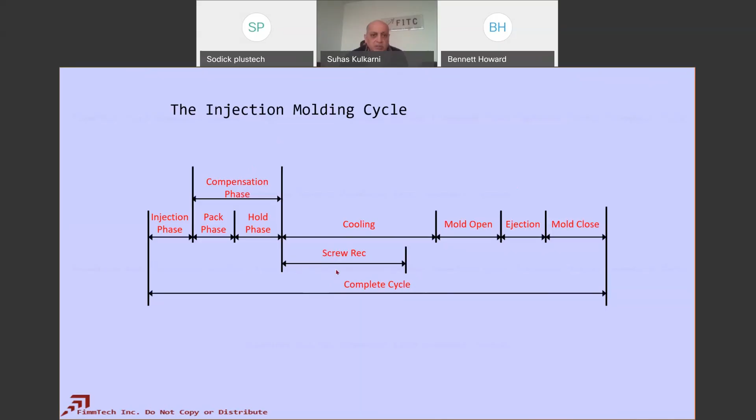There are what I call 11 plus 2 injection molding parameters on the machine. In no particular order of importance: cooling time, pack and hold pressures, pack and hold times, melt temperature, injection pressure, injection speed, back pressure, screw rotation speed, shot size, transfer, and mold temperature. So I say 11 plus 2, I don't say 13. Why is that? Because if you do not split pack and hold into two, you have 11. If you do end up splitting them, then you'll have 13.

When do you split them? A great example is if you've got a hot runner system, or if you've got a very large gate. In that case, you'll have to have a pack and hold separated. So these are the inputs.

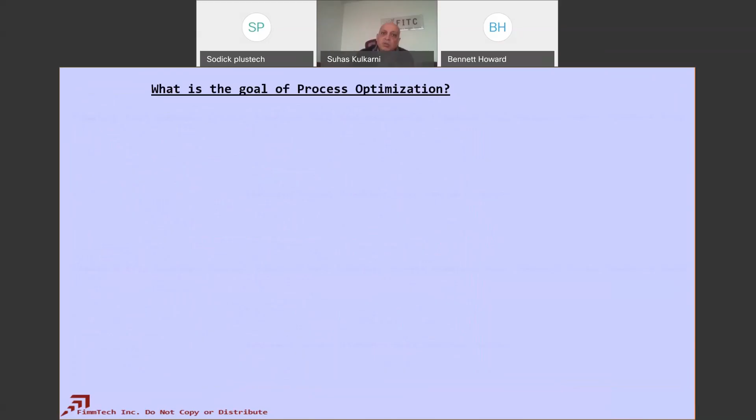Okay, thank you. So now let's understand - let's go back to the back pressure. So what do we do? What are we trying to do always when we're doing a mold qualification or coming to the molding process? You're setting the molding process so that the parts you make are going to be very consistent. That's what you're trying to do. So you have to ultimately reduce all the variations.

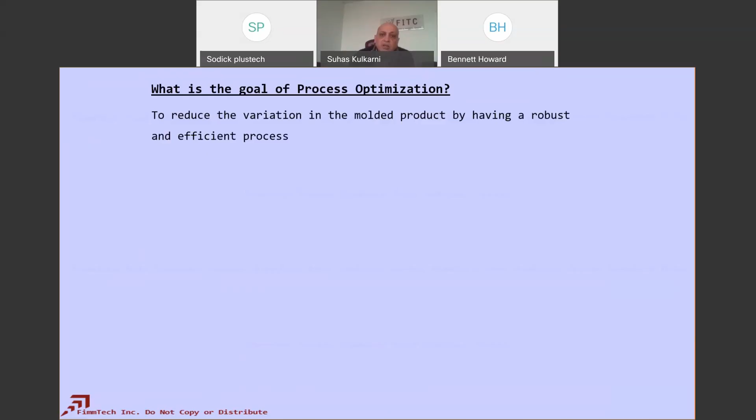Variation, where does it come from? Variation can come from all these molding parameters, all these 11 plus 2 molding parameters. You'll get variation from each of them. So what is your job? If you want to reduce the variation in the final molded product, you need to make sure you reduce variation in each of these 11 plus 2 parameters. So you cannot get rid of variation - it will always be present. You just need to know how to minimize it.

And that's one thing I've done over the years - I've developed some of these techniques, and some of these are not my own techniques. For example, the viscosity curve - people from RJG, teacher John Bozzelli, came up with these things. Of course I borrowed that, but there's a lot of other stuff. If you go through my class, it's a 4-day class, you'll see there's something, especially design of experiments - that is my huge, big area in injection molding. So I have come up with these things. In fact, the one I'm going to show you today is also something I came up with about 7-8 years ago, and I've started formalizing that and teaching it.

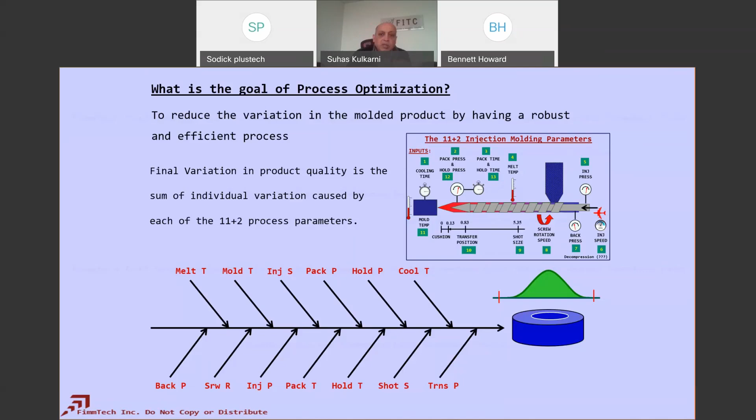So my goal is to optimize and reduce the variation in each of these 11 plus 2 molding parameters. That's when you'll be able to reduce the variation in your molded product. Where do you get your current source from? One second here, I'm trying to hide a panel.

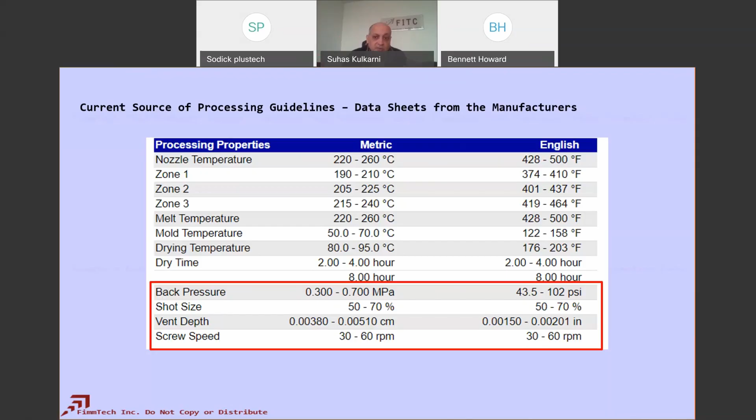I have done some studies on vent depths. Look at this vent depth, it's 0.00201. Can you show me a machinist who can machine that to that accuracy?

So screw speeds, I talk about screw speeds here, RPMs, right? RPMs is not a thing. So again, please do not take this as the Bible and say, hey, this is the molding Bible, and therefore this is what the suppliers are telling, and that's what I'm going to use.

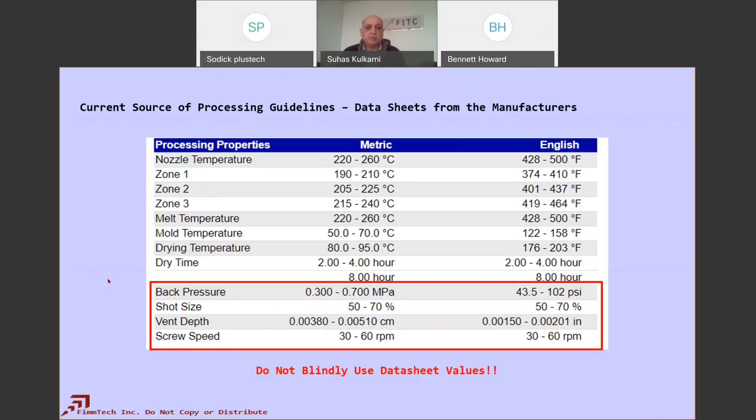So that's not the right way to do it. So don't blindly use data sheets. Also, data sheets, when they give you information, it's very misleading in other ways too. Look at this - it says fabrication conditions for injection molding. Of course they use this stuff. It says barrel temperature, chilled water.

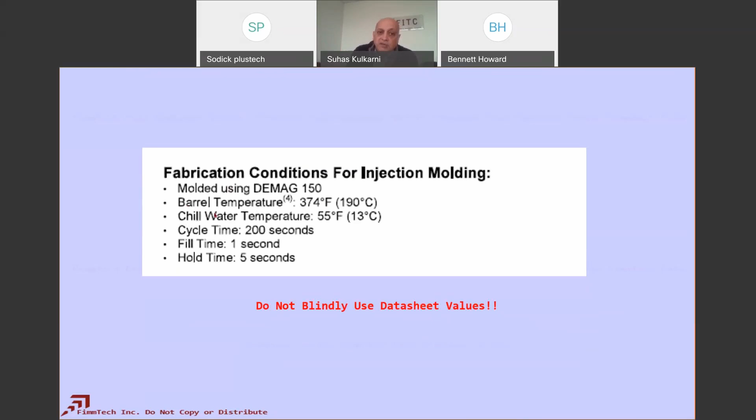Cycle time is 200 seconds. I don't know which company is going to be in business if they run a mold for 200 seconds. And this is a very large part, of course. Yes, but we don't work that way. And then they're defining fill times, defining holding times.

And then it says typical value is not to consider specifications, user should confirm their own result. So what I'm getting to is that, guys, for your back pressure values or any values, do not use the data sheets blindly. Be very careful when you look at the data sheets, and also educate your customers who are not in the molding business - educate customers that there's a lot of mistakes in these things.

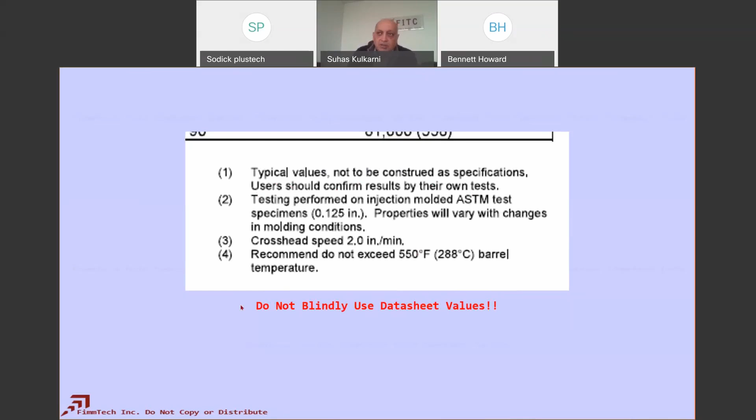I hope that somebody in the materials suppliers is listening to this talk, and then they go make those changes. So again, I'm very big on basics, so I'm going to tell you a few basics here. There's something called the PVT diagram.

This plays a huge role in back pressure, so I want to tell you this. What's a PVT diagram? It simply means that if you take any plastic and you start increasing the temperature, the volume increases. So here it is at atmospheric pressure, 0 MPa - the volume keeps on increasing as you start increasing the temperature of the plastic.

But now plastic melt is compressible, it's like a big ball of rubber band. So you can actually compress the same amount of plastic, and when you compress it at that temperature, what's going to happen is the volume is going to reduce. That's exactly what we do in injection molding - you melt the plastic in the molding barrel, and at high pressures, you inject it inside the mold.

When you inject inside the mold, because the mold is cold, it starts to cool down, and now the volume also reduces. So you're basically getting a combination of this PVT diagram inside your mold. That's the whole idea of using pressure sensors supplied by RJG or Kistler. What they do is that if you get the same pressure, volume, temperature at a given time inside the mold, that means now you have got the same quality of part. That means you've got the same amount of molecules, and therefore your density stays the same, and therefore you're going to get the same dimensions.

Okay, so keep this in mind, right? Again, this is a basic thing. How does it play a role in back pressure? You'll see that very soon here. So this is your PVT diagram.

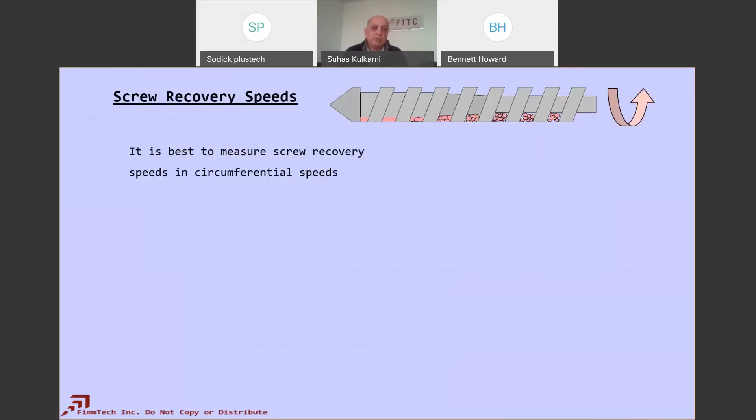Screw recovery speeds is related to, of course, because we're talking about screw and back pressure, all that stuff. Always make sure that you're measuring your screw recovery speeds not in RPMs, but always in circumferential speeds. Why is that? Because if you have got a large vehicle like this and a small vehicle like this, 1 revolution of a small tire is going to go a shorter distance compared to 1 revolution of a larger vehicle.

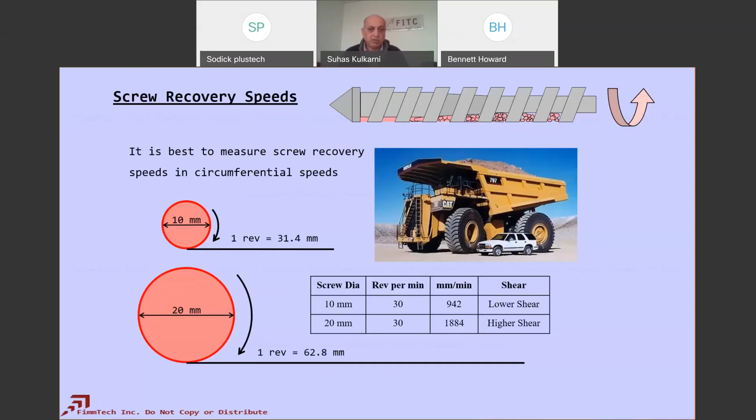So what happens is you have 2 screws, same RPMs, one is going to have a low shear, other is going to have a higher shear. That plays a role in your melt temperatures because you're giving shear energy to the plastic. Okay, so that's to do with screw recovery speeds.

Now, what's back pressure? So if you visualize yourself going down a slope with this load, or you're running down a slope. Saturday morning, you decide to go for a run and it's a big down slope. What do you tend to do? You tend to apply a force that is opposite to the direction of travel. You're traveling here, but you put some force opposite in this direction. Why? Because you want to control the rate at which you take this load down the slope.

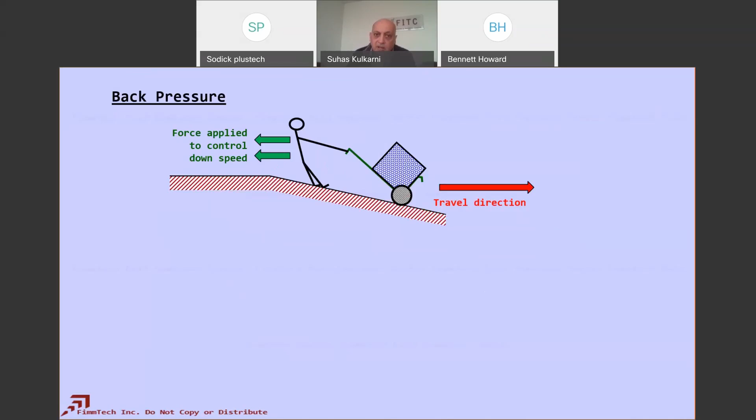If you don't do that, what's going to happen? You're going to crash and fall down. So what do you do? You apply that force. The same thing happens in injection molding. As the screw is turning, there is some amount of pressure that's applied at the back of the screw so that now you're bringing that screw back consistently, especially at high screw speeds.

There may be some people who are new into injection molding out here. The way this works is that during injection, let's just say the shot has been built up. During injection, this screw acts like a plunger. There is no function of the back of the screw out here. The flights are useless. During injection, it's only a plunger, just moving it straight. There's no turning taking place.

Once the plastic is injected inside the mold, then the screw starts to turn. When the screw starts to turn, it acts like an auger. So the plastic now gets conveyed in the front and it comes and settles in front of the screw. There is nothing pulling the screw back. As the plastic comes and sits in front of the screw, as it collects here, it now pushes the screw back. That's how this works.

Now, if I don't put some pressure here, what happens is that the screw can just turn erratically and basically come and make the shot size. The shot size is where you start the injection of the plastic. It can come in and hit, especially at high screw speeds. So you're going to have a bounce. If you think of it, there's going to be some bouncing taking place.

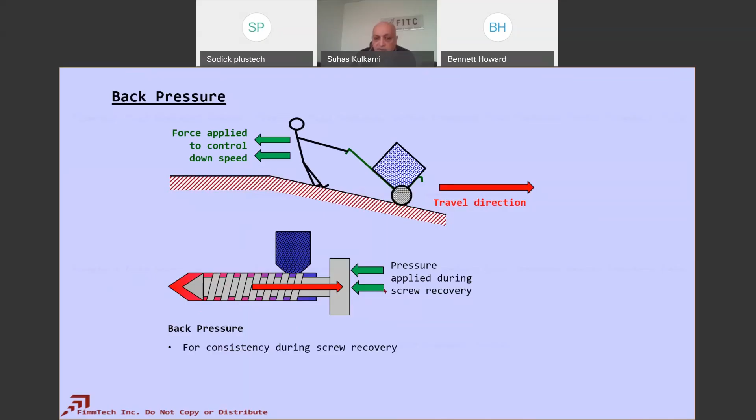It's going to come and hit your shot size, and what happens? The amount of plastic that is in front of the screw then is not going to be the same every single shot. So what you do is that you have to put some amount of pressure at the back, we'll define how much, so that you can consistently bring the screw back. That's the first thing you need to do. Then there are three zones on the screw: there is the feed zone, a transition zone, and then a metering zone. What does each of these things do?

In the feed zone, you do not want to melt the plastic, especially in the back part of the feed zone. Typically on a general purpose screw, a GP screw, this portion is 50% of the screw, this is about 25%, and this is about 25%. The outside diameter stays constant, but the inside diameter is constantly changing.

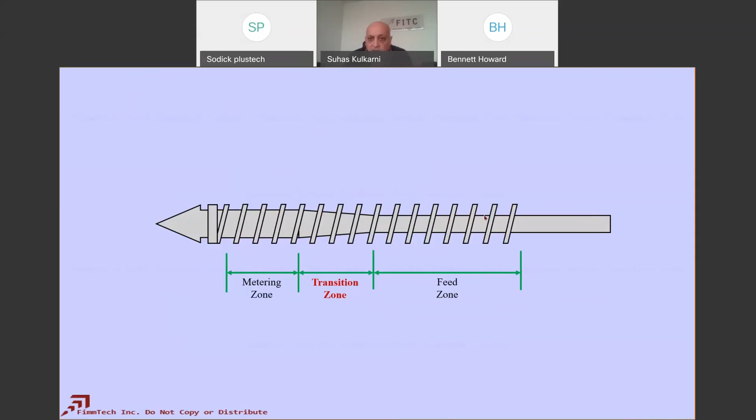So what happens? The plastic comes in here. If you melt the plastic right here at the feed throat, what happens? The plastic gets stuck here and is not able to get the fresh new plastic inside. So you just want to convey the plastic here, you do not want to melt it.

By the time the plastic comes to the front of the feed section or the back of the transition section, these things are like marshmallows, really soft, not completely molten but very soft by the time they come in this area. This is your feed zone.

Then you take these marshmallows, and because there's a reduction in the flight depth, or an increase in the diameter here, what happens is you're squeezing those marshmallows and pushing all the air out of the system.

Look at these images I've taken out here. It took me a long time to get these images, I had to pull the screw out like 5 times to get them this way. But you can see in the feed zone, the plastic pellets are all stuck to each other, like the marshmallows.

But you can see there's a lot of space. What is in between the space? That is basically air in there. When it comes to the transition zone, this is where you now start to compress it. As you start compressing this, you'll still see some amount of air in these areas, not unmelted plastic, but air.

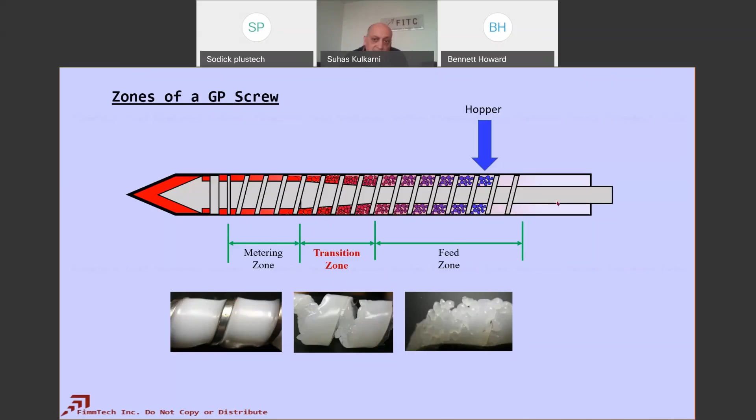But by the time this plastic comes to the back of the metering zone, or the front of the transition zone, now you have squeezed out all the air, or you should have squeezed it all out. This happens by applying back pressure - I made it bigger here for you guys to see.

Applying that back pressure from the back over here helps you compress these marshmallow pellets and push all that air back into the hopper. And that does happen. It's not necessarily only air, by the way.

It could be some of the volatiles that are in your plastic. Every plastic that comes to you to mold is not just neat plastic - it always has some chemicals or additives added to it. It could be some low molecular weight additives like plasticizers and others, which can burn easily.

So what happens is as they start conveying because of the heat, they can start getting burned because of friction or shear heat and so on. All those gases, all those volatiles, now start getting pushed out through the hopper.

For some of y'all who have had a lot of experience, you may have noticed that you're running plastic and you start seeing a lot of splay on the parts, etc. Or sometimes when you move the hopper back and look at the feed throat area where the plastic's coming in, you may see some sort of residue there, some liquids and residues.

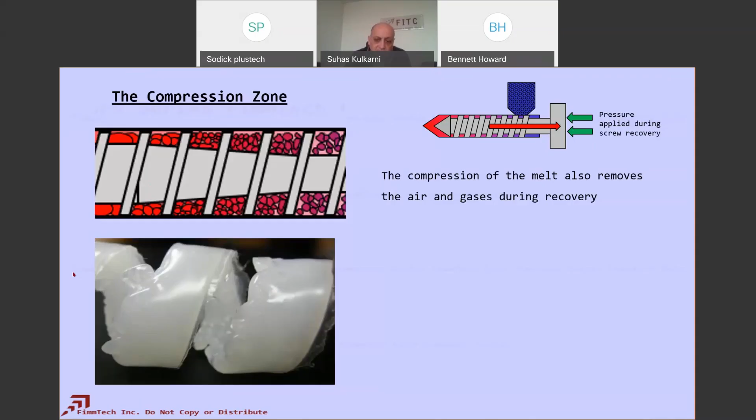You end up with splay, right? So I just ran this part yesterday for my seminar, and I had to do this in class today. I said, let me get some fresh parts. So see, this is with back pressure.

And then when I took the back pressure out, you can see the splay out here in this area of the part. So why is this coming? It's because that air did not get out of the melt stream.

Therefore, applying back pressure is important for you to get rid of the splay on the parts. It's a cosmetic defect, if it comes onto the surface it is splay. If this air stays inside the part, then it becomes a bubble or a void inside.

Splay always happens because of fountain flow. As the plastic flows through the cavities, you get this fountain flow effect and you get splay on the part.

So again, please do this when you guys go back to the molding machines. Go take a dark part like this. I actually run a white part for my seminars, but I put some colorant in there yesterday. Take a dark part like this.

Don't change anything, right? In fact, leave your pack and hold the same way. Reduce your back pressures by certain amounts and keep reducing, and you'll start seeing this splay on the parts. Do it for ABS, do it for this, actually an HDPE, Alathon material.

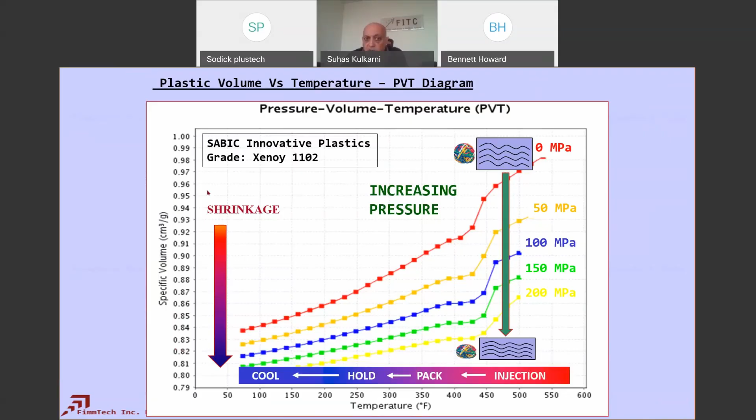Reduction in volume is what? Is shrinkage, right? So you need to get consistent parts. What are we looking for? We're looking for consistencies. There are three types: cavity to cavity consistency, shot to shot consistency, and run to run consistency.

So we are always looking for consistency, consistent dimensions. What is consistent dimensions? That means we need consistent shrinkage. If you want consistent shrinkage, that means we need a consistent amount of molecules inside the cavity.

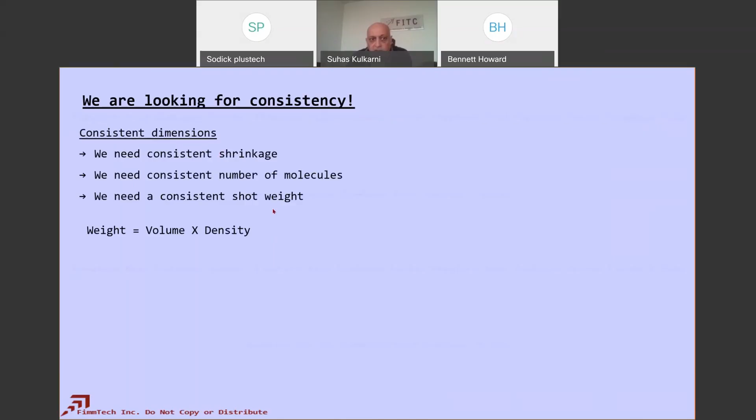From shot to shot and run to run, what is consistent number of molecules? It means consistent shot weight. What's the formula for weight? Weight is equal to volume multiplied by density.

What, for us, is volume? Shot size to transfer, right? That is a volume. And then shot size to cushion, where we end up with. If your cushion value, that's a total volume that you're going to inject. We want to find out if the amount of plastic inside the cavity is constant.

We know that shot size to transfer position, we are going to transfer into pack and hold by position. So this volume distance is constant, therefore volume is constant. And therefore what is remaining? If you want a consistent weight, you want consistent density, which is the melt density. The plastic melt density has to be constant.

And therefore a consistent melt density is required for us. Again, plastic melt is compressible. That means if I put more or less pressure here, the amount of plastic inside is going to start changing. Therefore you need to have an amount of back pressure, to make sure that melt density stays consistent.

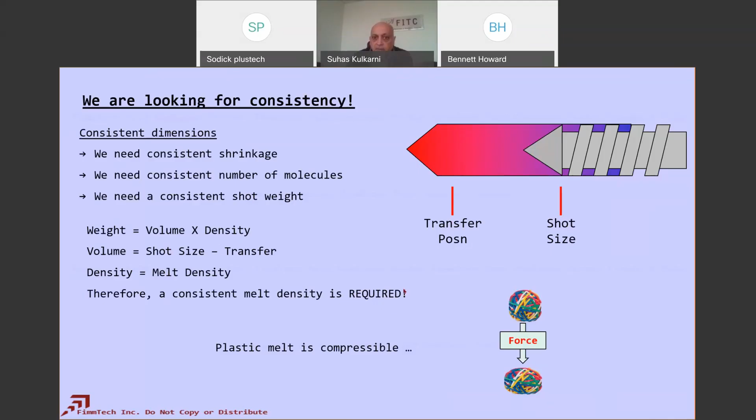So what do you do in this case? If I want to have a consistent melt density, what should I do? The answer is very simple.

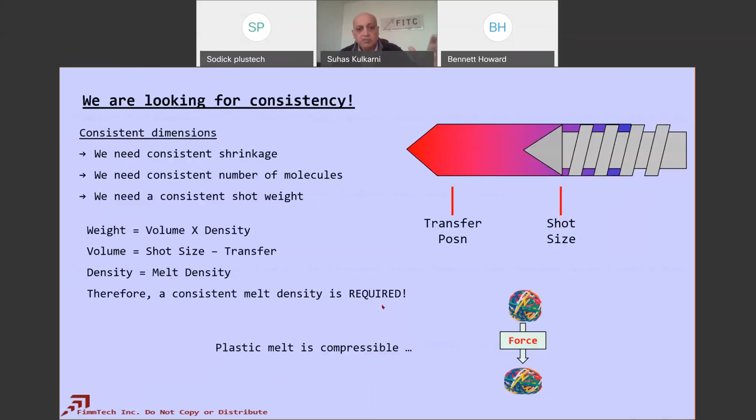So all I came up with, and I'm just going to show the data from yesterday's seminar here. This is the awesome software that I have for process development. Let me open this and show you. I'll open the seminar mode. This is the seminar and melt preparation, and this is my April.

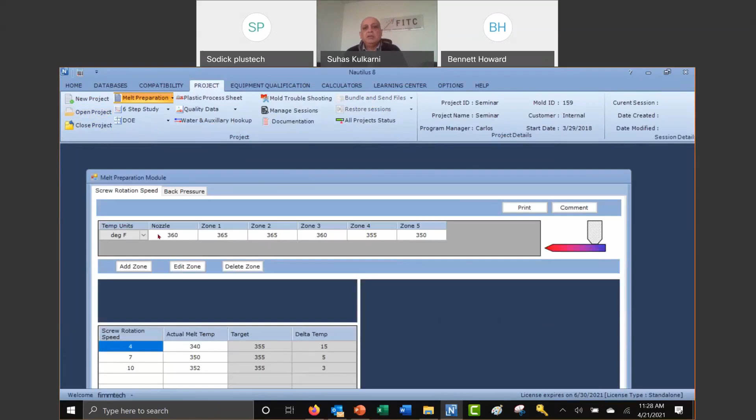So this is the data from yesterday. We did this, right? The first thing you do, of course, is screw rotation speed. I'll come back to this. All I do to confirm I've got consistent back pressure is mold 10 short shots.

I mold 10 short shots without any pack and hold pressures and I weigh them with the runners. I set the back pressure at 250 psi. I molded 10 short shots. I've got the min and the max and I got the range. I went from 250 to 500 to 750 to 1000.

What happens? As I started adding more and more back pressure, see the range kept on decreasing. What is the range? The range is the difference between the max and the min. So see, it became more consistent.

At 250 psi, the range was 0.328 grams. At 500 psi, it was 0.076. At 750 psi, it reduced even more to 0.041. See, the more I pack it out, the more consistency I get from shot to shot.

So that's what shows you. It's very easy to know. And I'll come to this.

If you go past a certain point, so I went above from 750, I went to 1000, what happened? The consistency decreased. It went to 0.076.

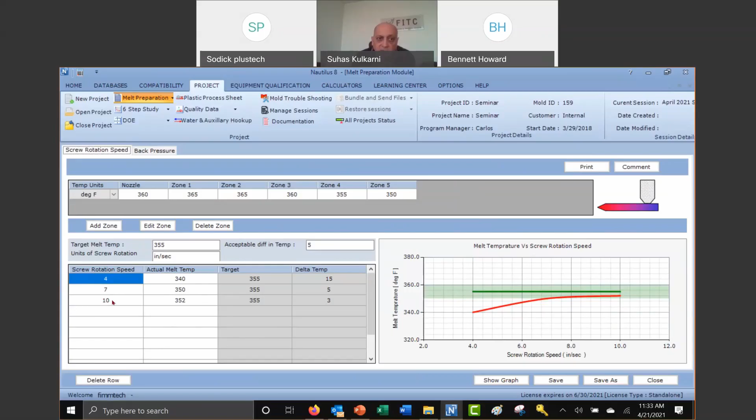But again, this is part of the screw rotation speed. And why am I telling you this? Because there's another concept I'm going to tell you about screw rotation speed here very soon.

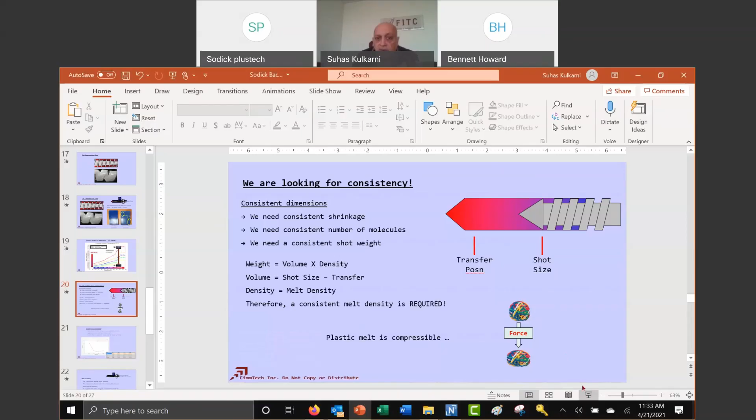So going back to back pressure, this is how you set your back pressure values in there. So the study is very simple. All you're going to do is come in here and mold 10 short shots at various back pressure values.

Make sure when I say weigh and record the short shot weights, you must record all the parts and the runner system, because that is your total shot that is being injected from the shot size to the transfer position.

Okay, good. So this is how you set your back pressures based on a study that we have here. We've got three reasons why we need to use back pressure correctly. First is for consistency during fill.

How do you know it's consistent? You start looking at your screw rotation times. If your screw rotation times are consistent, that tells you you're recovering the plastic consistently. It doesn't mean everything else is consistent, but your screw rotation time should be very consistent. If it's going all over the place, like 10 seconds plus or minus 2 seconds, that's a lot of variation. So that's the first thing you look for on the history or output page on the machine.

Second, you need to make sure it removes all the air during recovery. And third, you compress it to get the same equal amount of consistent shot, the consistent amount of plastic, for the next shot.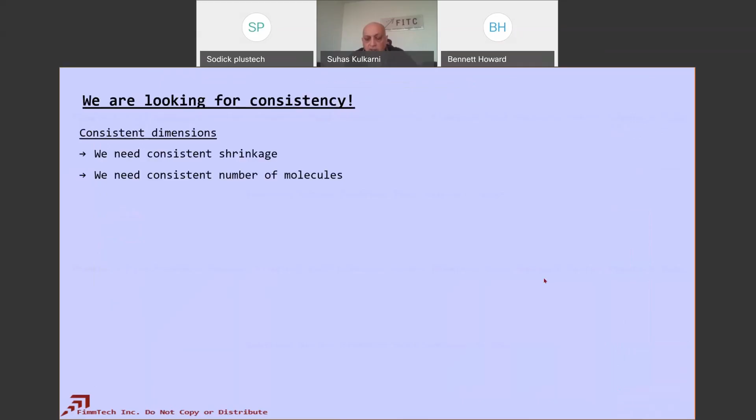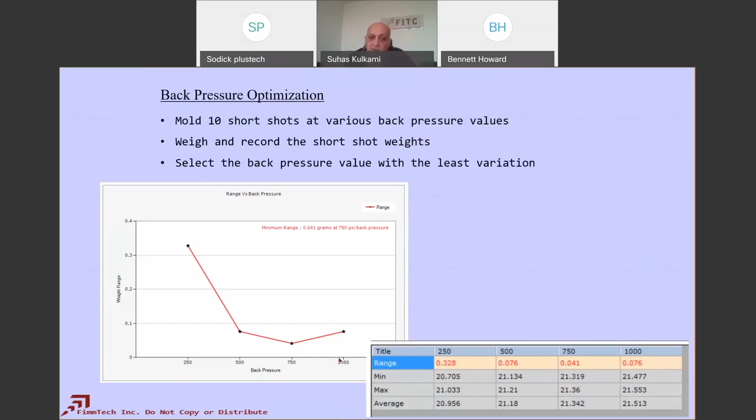If you're getting splay at 750 psi, and if I increase the pressure to 1000 psi and it goes away, then you must use 1000 psi. That's what I would use. There's still a little bit of variation, but the number here is 0.076, which is still not too bad. So you must use a higher pressure if you're getting splay problems.

Increasing back pressure increases melt temperature, right? A lot of people say that. Yes. Think of a car: if you floor it, what happens? The tires start turning in place, and basically they're burning the rubber, and the temperature goes up there.

That's exactly what happens if you go beyond a certain point: you're putting enough back pressure that now there's a lot of resistance for the screw to come back. Remember, there's nothing pulling the screw, it's always being pushed because of the plastic. But if you put so much back pressure, you're compressing the melt, the screw is turning in place, and when the screw turns in place, you start seeing an increase in the melt temperature.

So you will see an increase in the melt temperature in this region, but you should not see any melt temperature increase in this region. In this case, it's only the shear energy, the shear from the turning screw, that's going to melt the plastic. The turning of the screw, like I showed you in that graph, is going to give you an increase in temperature, but it's also conveying the plastic.

But in this area, without changing the screw rotation speeds and without changing the barrel temperatures, you will definitely see an increase in the melt temperature. Again, this is the only place I get rid of splay.

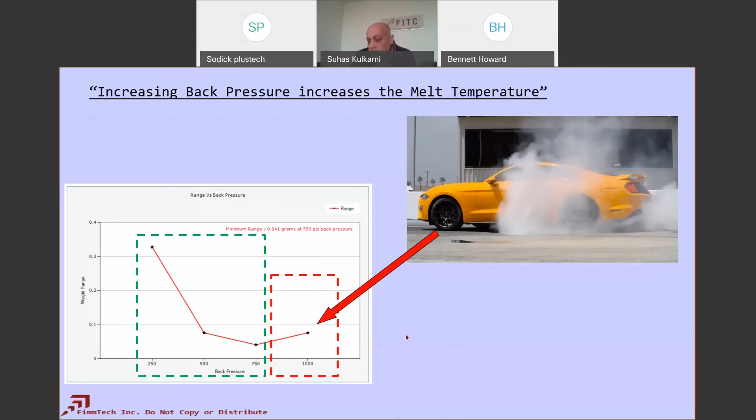Melt temperature will increase in this area, but not in that area. Decompression is related to back pressure, by the way. What is decompression? It's because I've now applied back pressure here—I've put 750 psi of back pressure.

When the mold opens, if it's a cold runner mold, this area is completely empty out here—there's no sprue. So the pressure is going to come out of the nozzle tip. And because it comes out the nozzle tip, you might freeze the plastic there, and you're going to have issues on the next shot.

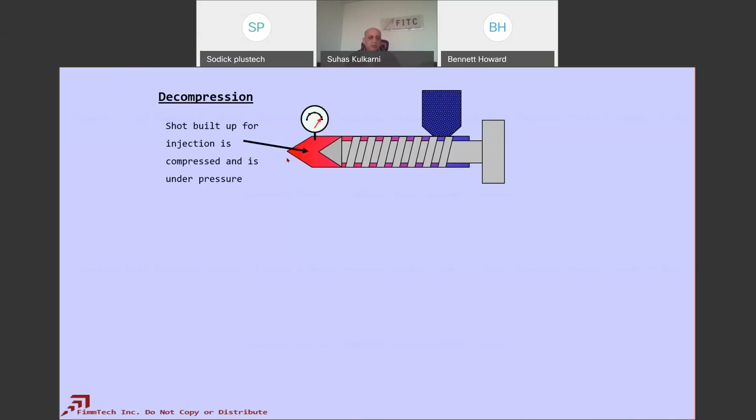So what you do is linearly pull the screw back without rotation, simply reducing the pressure inside the barrel. That is what is called decompressing the melt.

Use as little decompression as you need. Don't use too much. All you have to do is make the pressure inside the barrel zero, so it doesn't drool out.

So that is related—the higher back pressure you use, the more decompression you're going to require. But typically, even on a 35 millimeter screw or up to a 60 millimeter screw, you don't need a decompression of like one inch. It's literally maybe 0.25 to 0.35 or 0.4 inches. Even half an inch is too much.

Some people say that with too much decompression you'll suck air into the barrel. That is totally impossible. If you're sucking air in from this region, that means there's a leak. And if there's a leak, during injection plastic is going to come out, because plastic is injected at extremely high pressures. So you're definitely going to leak plastic if there's a leak—it's impossible to suck in air during suck back.

Think of a hot runner system as a continuation of the mold. Really, the effect you should always look at is what's happening inside the cavities—you've got a pressure sensor in there. With hot runner systems, the pressure you apply behind the screw is still used to compress the melt inside the hot runner system, and then inject the plastic inside the cavity. It's like a big cushion out there.

So really, if I'm understanding your question correctly, if I've got a part that I'm molding with a cold runner, and the same part is now being molded with a hot runner system, what influence does that have on the pressure inside the cavity? Definitely, if you have a cold runner system, you're going to end up with lower pressures inside the cavity because of fountain flow, and the PVT or pressure graph is going to look different compared to a hot runner system.

But again, you must try to match the PVT or the pressure graph from an RJG sensor or whatever sensor in both these things. It's really not a whole lot different between the two systems if I'm trying to make the same part. And if I did not understand your question properly, whoever asked it, please contact me and we can discuss it further.